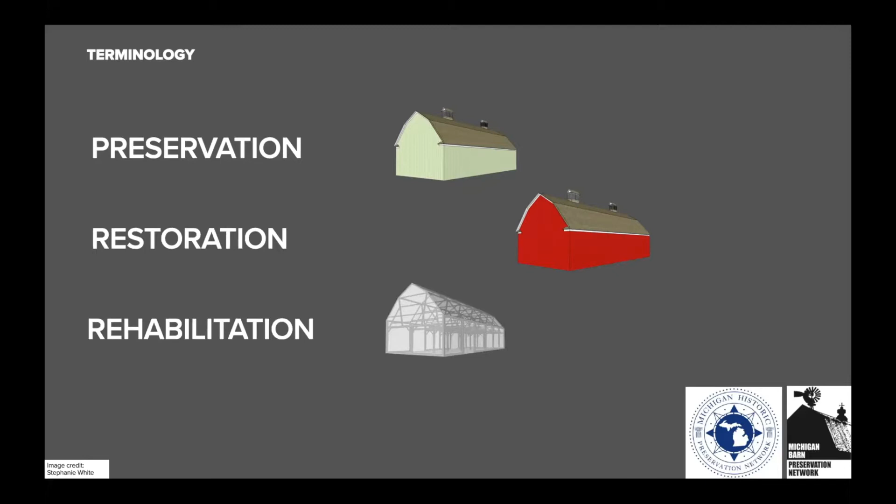I will begin with terminology. Because we're the Michigan Barn Preservation Network, let's start with the word preservation. It's the act or process of keeping something in existence. There are different ways to go about preserving a barn. You can either preserve a barn by stopping all deterioration. You can restore a barn and take it back to what it originally looked like. Or you can rehabilitate or adaptively reuse a barn and turn it into something else, like a house.

The first farm building is a barn. A barn is a structure used to store a harvested crop or shelter livestock.

A farmhouse is the dwelling used by people who lived on the farmstead. Sites may have more than one dwelling. Residences for hired farm workers might also exist. Occasionally, the original house is used as a granary, chicken coop, or other building after the new farmhouse was built.

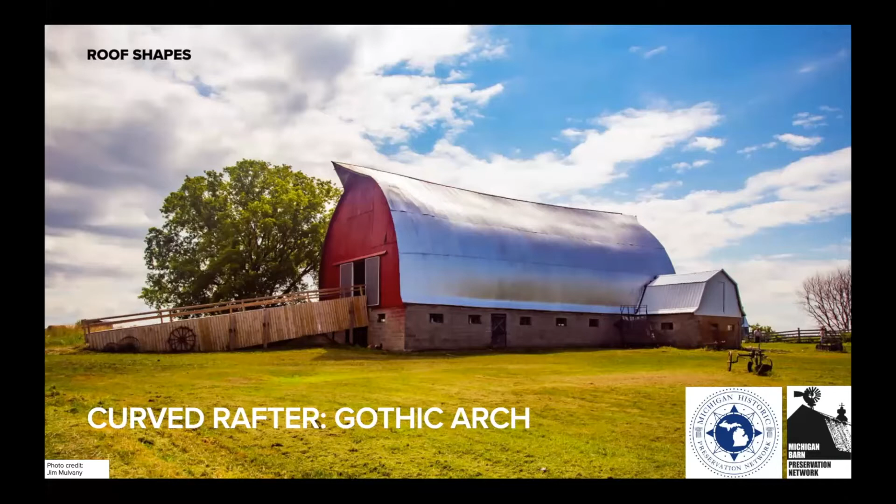There are different types of curved rafter roofs. This one is a Gothic arch, which has a defined roof peak or ridge line, and then slopes down on a curve on two sides till it meets the sidewalls.

I'd like to say that this wonderful photo is by Jim Mulvany, one of our board members, who puts together our calendars and takes many of the photos as well, which is a lot of work.

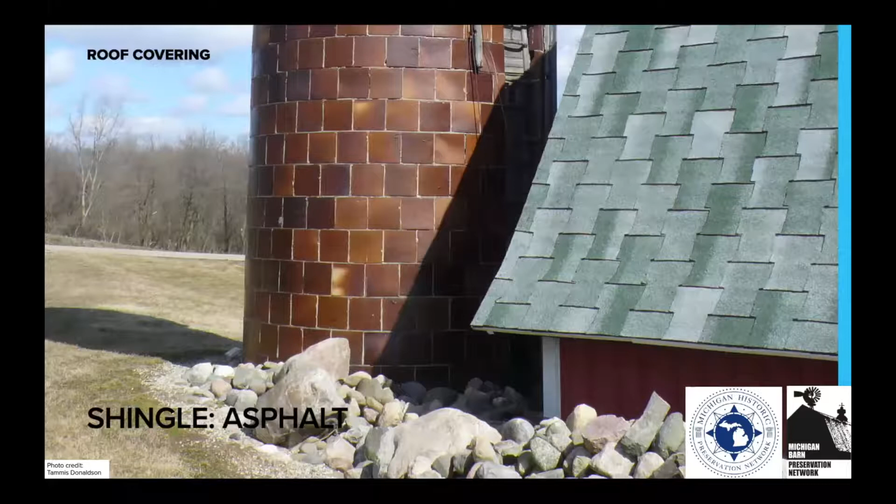Now we're going back to the roofs to look at roof coverings. Asphalt shingles, on the right here, vary in shapes, made with an asphalt base covered with mineral granules of varying color and texture.

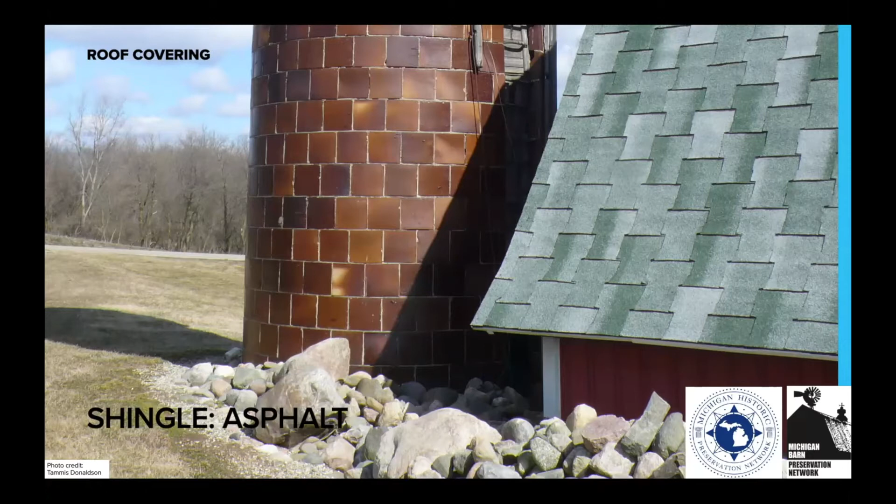Wood shingles are the original roof covering material on most early Michigan barns. Individual sawn shingles, 12 to 16 inches long, taper from very thin at the top to between 1/4 to 3/8 inch thick at the exposed ends. Widths are random from 3 to 12 inches wide. Applied in parallel rows, the shingles cover the joints between the shingles below.

Ribbed steel is the most modern of the roofing materials defined here, sometimes called pole building steel. It can be used as roofing or siding in new construction, or covering old roofs or siding. It's made of sheets of steel formed with parallel rows of ridges 8 to 12 inches apart. It comes pre-painted in a variety of colors.

Corrugated steel comes in sheets, usually galvanized, shaped in parallel furrows and ridges, giving a rippled effect. It typically covers an earlier wood or asphalt shingle roof. It may appear dull gray in color if the zinc plating, called galvanizing, is still intact. It may be partly or totally rusted. If painted with aluminum paint, it will look bright and silvery. Painting a metal roof that has begun to rust will extend its life by many years.

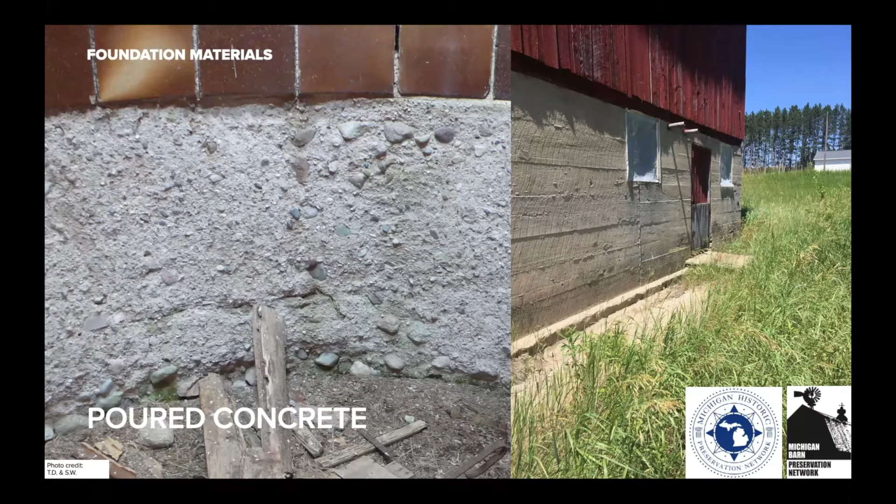Poured concrete forms a foundation wall of uniform texture with no joint lines. The surface may vary from very smooth to rough and pebbly, which is kind of what you see here on the left. You may also be able to see evidence of the formwork that was used to hold the concrete in place as it cured or dried, as shown to the right.

Glazed tiles are clay tiles with a shiny glaze in a wide variety of colors, dark red to creamy yellow, sometimes two-toned.

Concrete blocks are made with coarse sand aggregate and formed into hollow core building blocks, approximately 8 inches high and 16 inches long. Laid with mortar, they form foundations or walls.

Now we're switching to siding types. I was on a mission to find a photo of a barn with 100% block walls.

I found this on the Michigan Old Barns Facebook page. According to Steve, it's stamped steel sheets made to look like rock-faced cement blocks that were made to look like dressed stone.

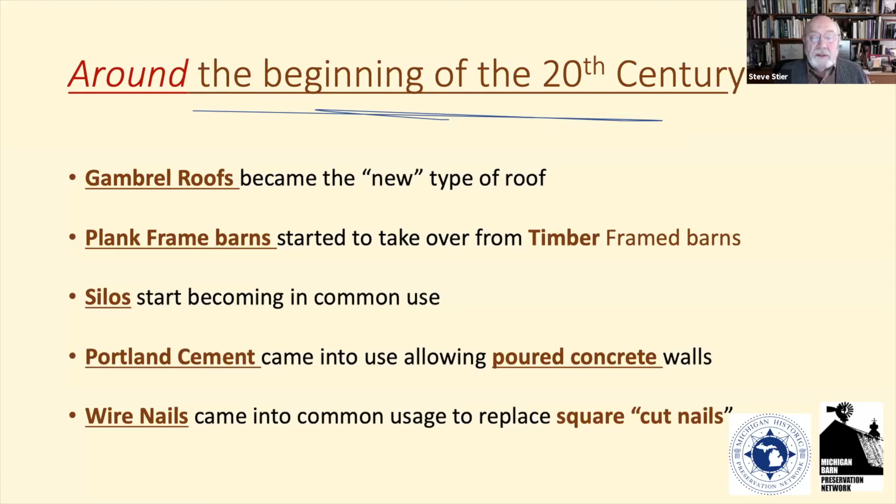Many people, instead of calling this barn a gambrel, call it a hip roof barn, which is a misnomer. I wanted to show you the difference. This is a gambrel roof barn, and this is a hip roof. The definition of a hip roof is that each section of the roof pitches down to the eaves of the building, so it's really quite different from a gambrel roof.

One of the things about gambrel roofs is that the shape of the actual gambrel is widely varied. They are different shapes - every one is slightly different, and the different angles are quite widely varied. This is the Holy Cow Farm barn in Okemos.

Here's a gambrel roof barn, but the change in pitches is so slight that you have to wonder how much actual space they gained. I have a suspicion that a lot of times barns built around the turn of the century had a gambrel roof just because it was fashionable at the time, because the gambrel shape was more modern. You've got to wonder how much extra storage space they actually gained with this roof.

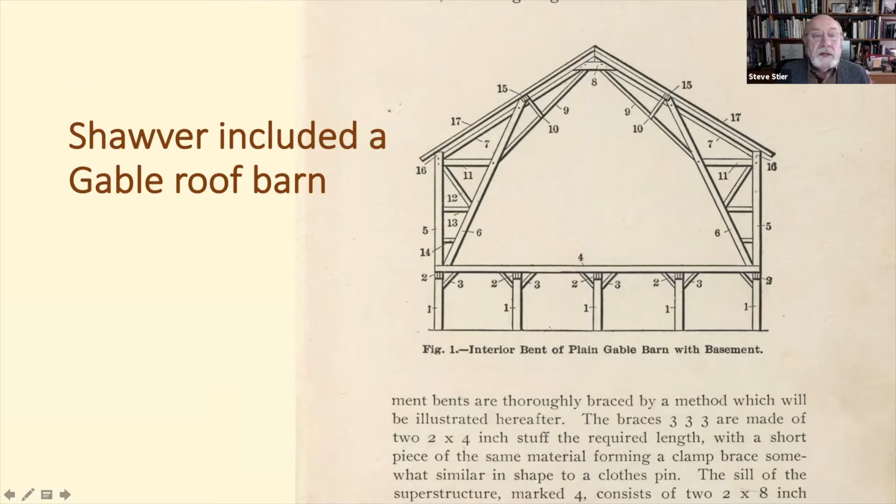There are still a lot of these out there in Michigan, and we see this one, a fairly large barn, which is actually a T-shaped barn. This is the Ottawa County Poor Farm Barn, which has been on several tours we've been on, and it was thought of as a real modern, large hay barn.

The other type of roof that became popular is what I call a curved rafter barn. Some of the early curved rafter barns were started in Clare County and the northern part of Isabella County, and we have a record of some of them being built as early as 1895.

This shape of barn we'll call Gothic because it's more pointed than it is round. This one, as Stephanie mentioned, is an ogee. This one in particular makes the barn look really quite fancy with the two cupolas on top, and it shows that some farmers were really kind of showy and were more than happy to show off their aesthetic appeal.

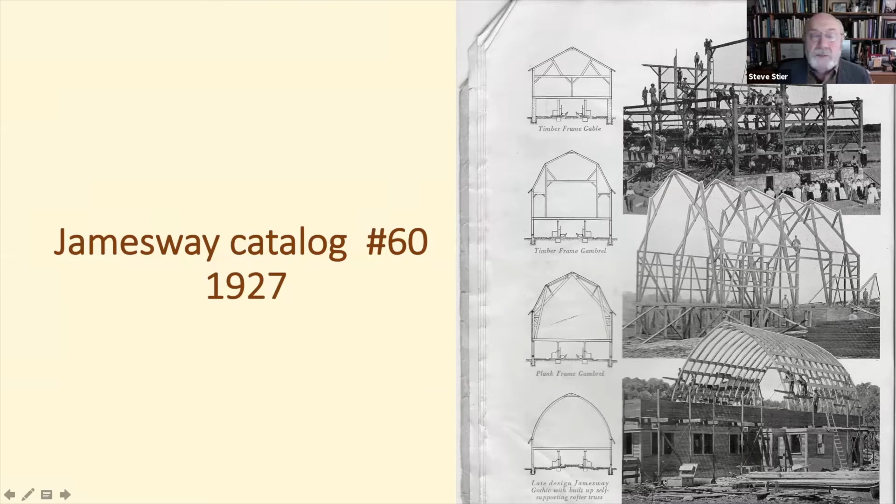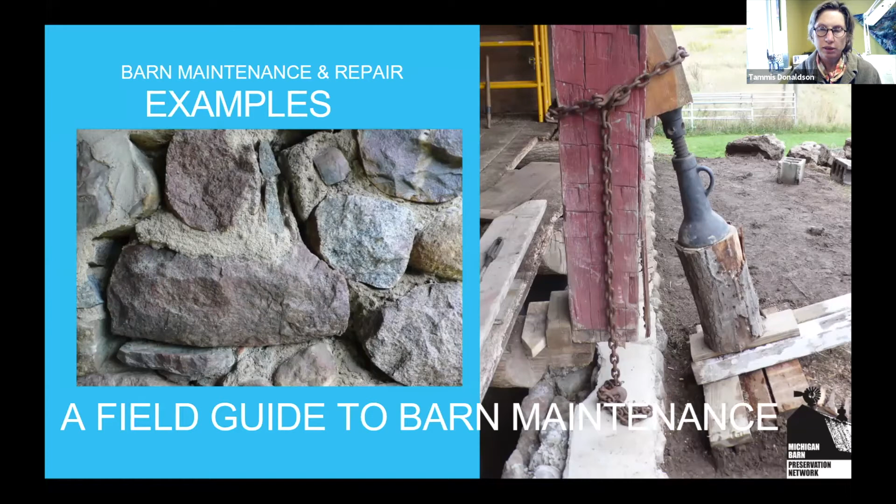Sometimes it's a fine line between maintenance and repair, such as the stone repointing picture on the left, which could be considered maintenance. Definitely the timber sill replacement on the right would be considered a repair.

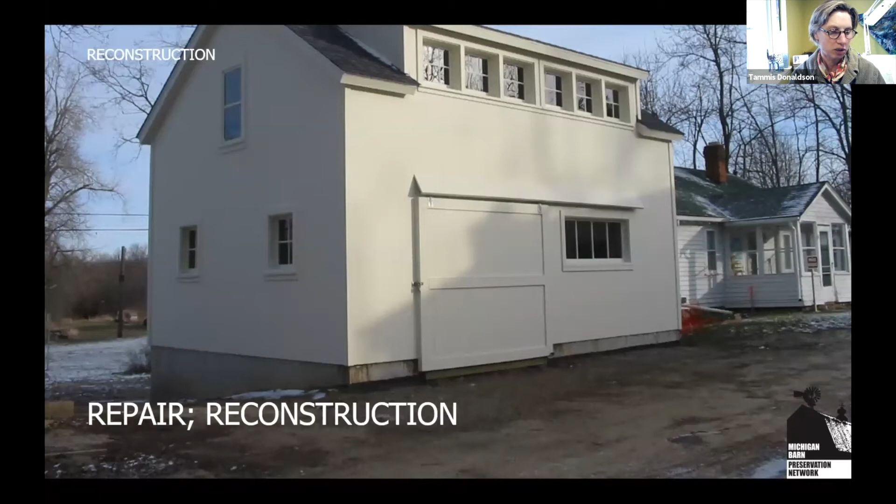The rear of the structure of this carriage barn was compromised when a rock and roll band took off the siding and infill studs for a bandstand. With good intentions, the mothball program did not hold up. The carriage barn was documented with photos and measurements before demolition. The repair was actually a reconstruction, based on the documentation that was performed before the demolition.

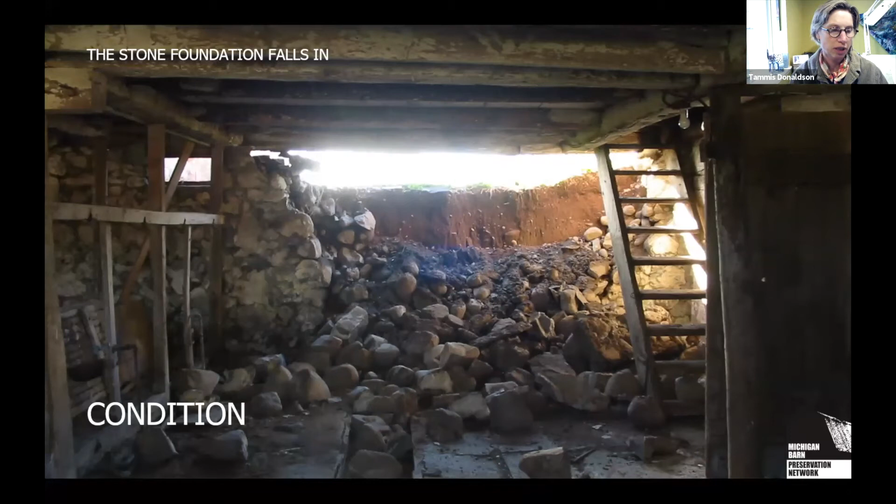The next example I call the stone foundation falls in, a great fear when you walk out to your barn. This is a 5-bay timber frame gabled roof bank barn in Oakland Township. Due to grading issues, water penetrated the stone mortar joints, and without maintenance, the foundation eventually failed. The roof had 2 layers of asphalt shingles on top of the original cedar shingle roof, all of which had reached the end of their lifespan. Because of the timber frame skeletal structure, even without the majority of the foundation, the barn is still standing, still straight and plumb, with the ridge straight across.

Repair: a new foundation was installed. All of the shingles were removed down to the original skip sheathing, and a new Sheriff-Goslin diamond-shaped asphalt roof was installed.